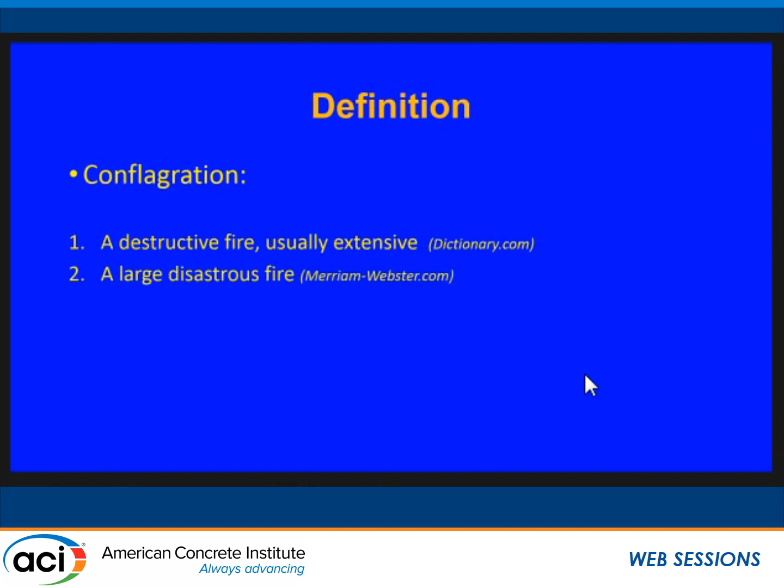So first of all, I want to start by giving you definitions of conflagration. In dictionary.com, it says it's a destructive fire, usually very extensive. For Webster's, it says it's a large, disastrous fire. And then, of course, the Oxford English Dictionary says an extensive fire which destroys a great deal of land or property.

These definitions of conflagration are important because they really are at the heart of what precipitated the use of building codes and regulations in communities in the United States.

So, I have a question for you. If I said, what conflagration do you know about or remember from history, what would be one of the fires that comes to mind?

Chicago. And sure enough, Chicago's the one that I decided I would start with and point out. Interestingly enough, you go read some of the history behind it. It started from a single source in O'Leary's barn. It doesn't say in the history that it really was the cow kicking over the lantern, although that's possible. But what's more important is the incident occurred during a time when there were high winds. There were a lot of flaming brands from the fire as it first started that began to be spread over a large area of Chicago.

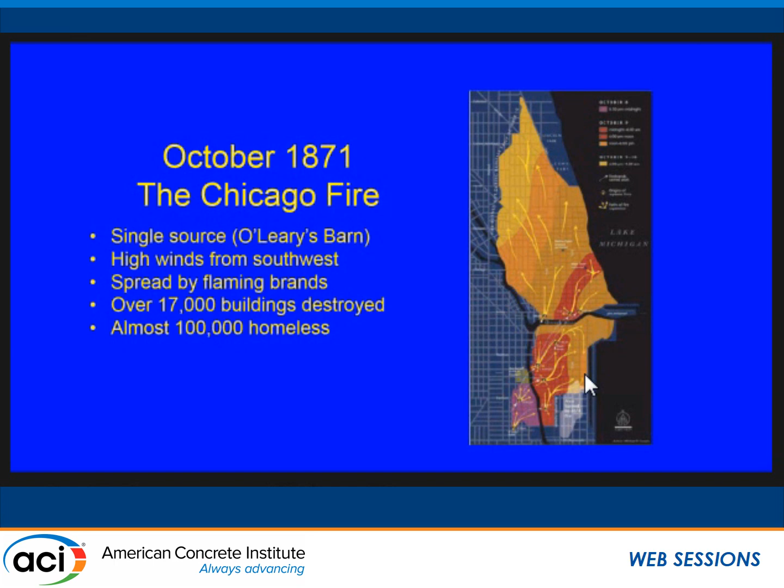17,000 buildings were destroyed, many of them constructed of wood. I'm not here to say that wood is a bad material, it's not, but it is unfortunate, it has that characteristic that it does burn. That helped contribute to the spread of fire, and when it was completed, it left almost 100,000 people homeless.

Well, there were other conflagrations that have occurred, some even before the Great Chicago Fire. One of them was in New York City in 1845, a whale oil and candle manufacturing facility. They actually used Spanish moss as part of their process, and some Spanish moss caught fire outside in the yard. Of course, flaming brands started to get spread by wind.

As part of that, they had a lot of buildings that were constructed of wood. And when the fire finished and was brought under control, 345 buildings were destroyed, $5 to $10 million in property damage. That was the last of 3 major fires that the city of New York actually had. They had one in 1777 and also in 1835.

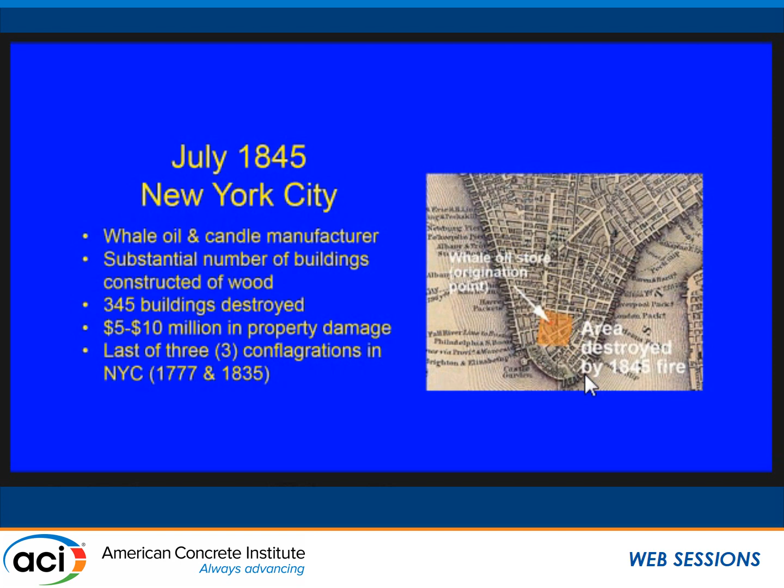One of the other ones was in Ottawa, Canada. Again, precipitated primarily by a building of wood catching on fire, a lot of closely spaced buildings, high wind. One of the other things that came into play then, and is probably true of these other fires that I just mentioned, was that the fire service sometimes didn't have the kind of equipment needed to fight these large fires.

Water supplies in the city sometimes were not adequate either, so many of these things created some of the difficulty in trying to address them. But regardless, this particular fire spread and thousands of buildings were destroyed, and of course I've shown a picture at least of some of the aftermath.

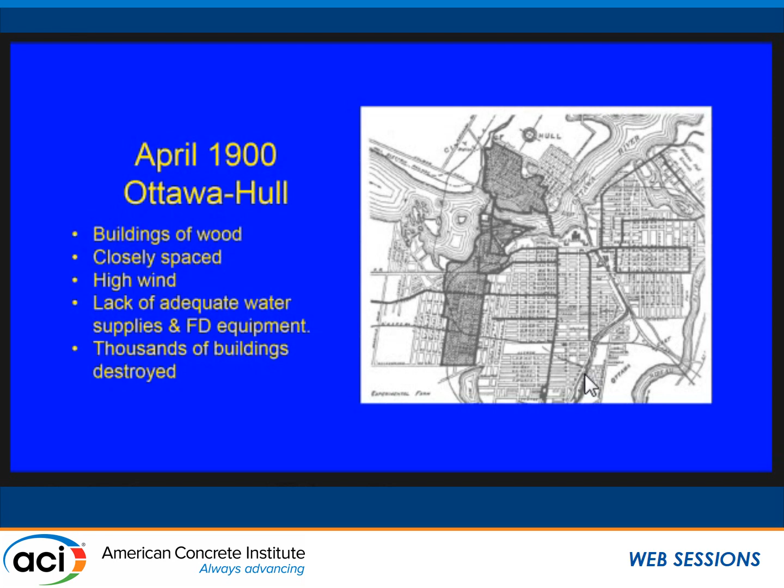Many times when I think about these fires, as I was putting together this presentation, I wanted to tell you - I kind of discovered this one, I didn't know that - but Jacksonville, Florida suffered a major conflagration in 1901. Same contributing factors: buildings of wood, high wind. In this case, 148 city blocks got destroyed, and over almost 2,400 buildings were destroyed in this process.

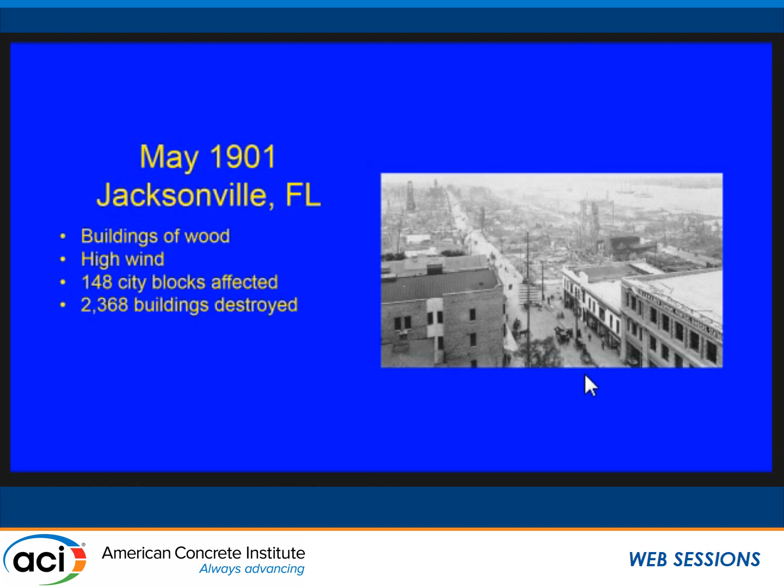And so the point I'm making is that the cities back at those times, it wasn't limited to what we think of as the big cities - the New Yorks, or the Chicagos, or even the San Franciscos - although all of those have experienced it, but even some of the moderate-sized cities in other parts of the country.

There was another fire in Canada worth mentioning: Toronto in 1904. That was their second major fire - their first one was in 1849. This second fire, 20 acres destroyed, mostly the business district, which represents a significant amount of property investment. In this case, they estimated $10 million in property damage. I should acknowledge these dollar amounts are dollars based on the time at which they occurred. They're not necessarily present-day dollars, which would be significantly higher.

And then there was also in that same year a fire in Baltimore in 1904 - 24 blocks of the business district. High winds contributed to it, buildings of wood construction. In this case, 1,500 buildings destroyed and an estimated $50 million in property damage.

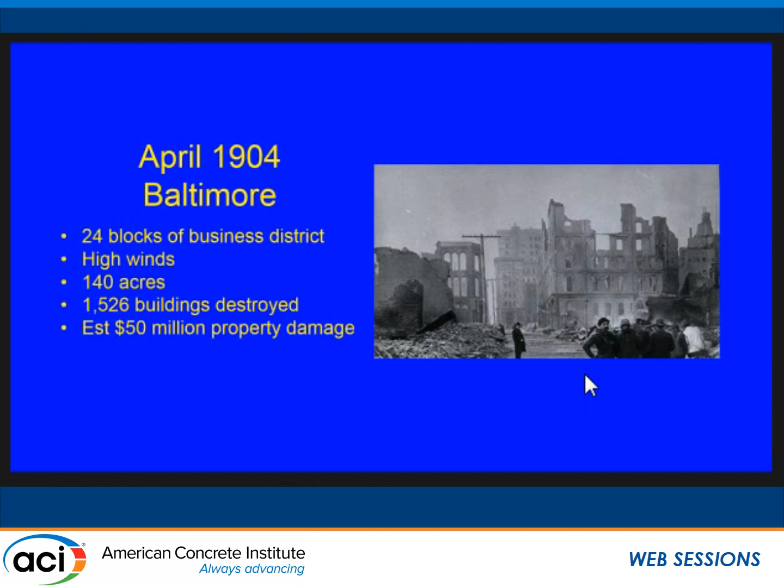And I want to stop right here and mention the 1904 fires in Toronto and Baltimore were actually, in terms of conflagrations, a tipping point for what really started precipitating building codes in the United States. It was precipitated really, let me say, earlier in 1866, when the insurance industries got together and formed a group called the National Board of Fire Underwriters. As far as I'm concerned, I describe them like a trade association for the insurance industries.

But their focus, because of these major fires that were occurring and the losses they were experiencing, was to try to see if they could develop fire-safe criteria for communities, to see if they could in fact set up a grading system and rank cities on how well they have fire service and water supplies and things to protect the properties, and then to provide consistency, because they found they were all over the board on what kind of requirements they had and what things they would underwrite.

And so that combination of things is why they came together, but they really didn't undertake a set of rules or things until those two fires in 1904, Baltimore and Toronto. All of a sudden the losses were so huge, they said, whoa, we need to do something. And so lo and behold, they got together and through their technical committee - not unlike we see operating today, even within ACI - developed a building code called the National Building Code.

And in that building code, they started looking at the features from what had happened before and what should be required going forward. And of course that included things like, in the very heavily urban areas, using more fire-resistive construction, limiting the amount of wood construction, paying attention to the municipal water supplies and what kind of water supplies are available to the community, paying attention to the fire service and whether they have adequate equipment to fight those fires, and even doing things like establishing fire districts. And I'll come back to fire districts in a minute.

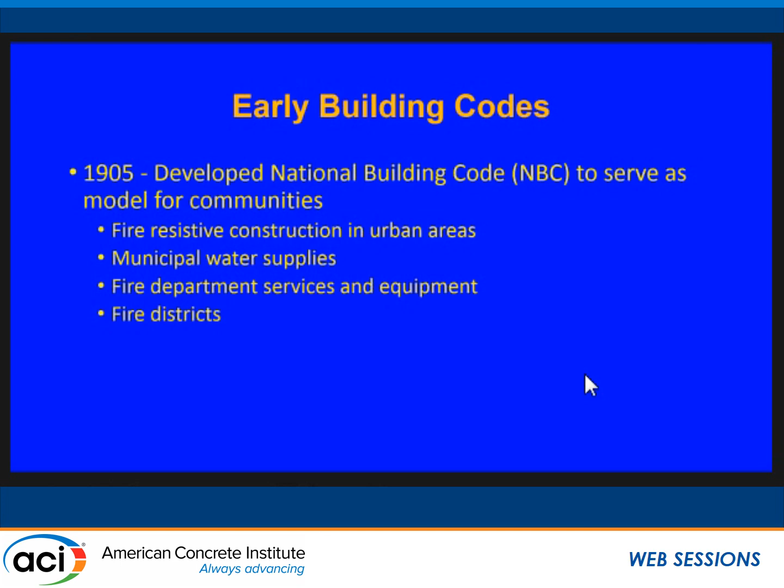But I do want to say, I threw this one up there just because I happen to be from the South - for your benefit, I'm from Macon, Georgia, about 90 miles south of Atlanta. And I didn't even know this till I was doing the research on this, that even Atlanta experienced a conflagration in 1917. In this case, they had the same characteristics: buildings of wood, large area - 300 acres, 1,900 buildings destroyed, 10,000 people displaced, and about $5 million in damage.

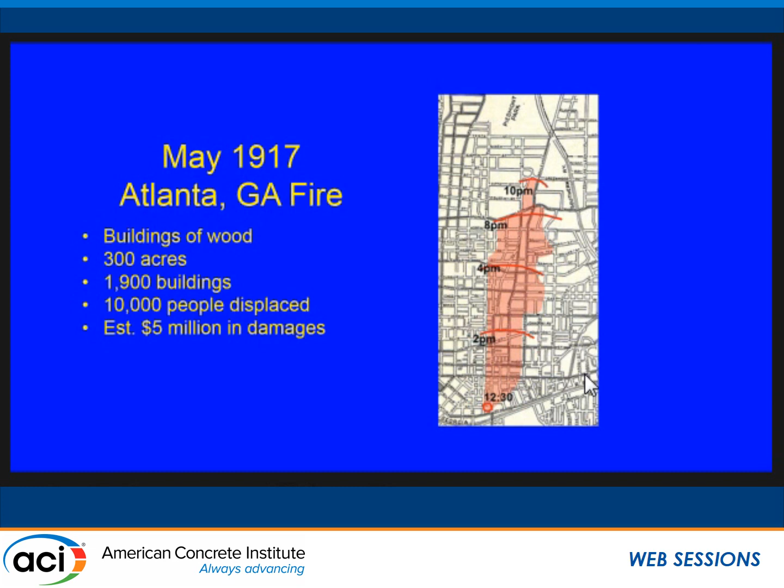That's after the 1905 National Building Code was established, but like anything, and we see today, when codes get set, sometimes the actual impacts of them don't show up till several years down the road. What was occurring after the National Board of Fire Underwriters established this code was a lot of municipalities were adopting code documents.

I happen to have in my possession two documents, from the city of Macon. I used to be a building official there. One of them is the 1914 building code, the other is the 1926.

In both cases, when I've looked at the provisions in those documents - they're not real big - and compared them to the 1904/1905 National Building Code, some of the provisions are very similar, usually encouraging fire-resistant construction and limiting wood in heavy urban areas, which would include setting up fire districts.

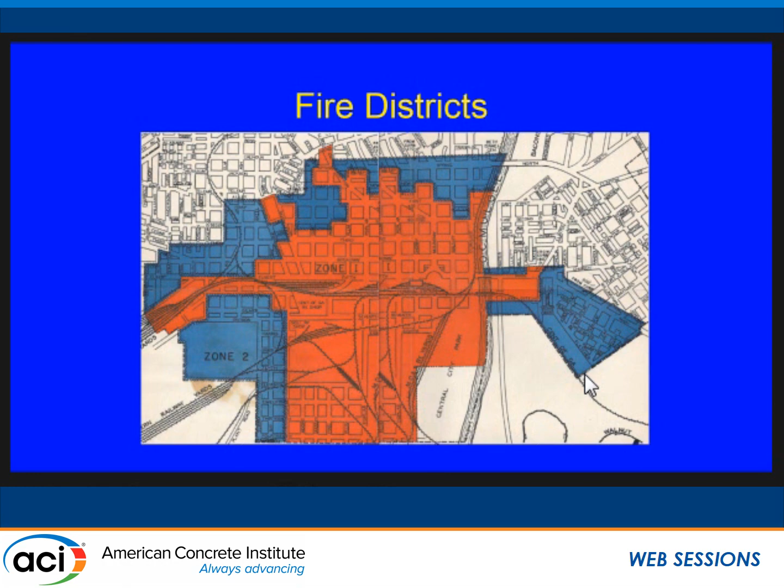Macon, when it first adopted those codes, set itself up with fire districts where it limited the amount of combustibles in those areas because of the high property value, and also required in some cases fire-resistant construction, and started limiting the size of buildings based on the types of materials being used to build them.

The whole purpose of that is to try to minimize damage to property should a fire event occur in a building. As time went on, one of the things that happened was the West Coast part of the country looked at the National Building Code by the insurance industry.

They really found it didn't totally suit their needs. Some of the means and methods of construction in the western part of the country were different than what was in the Northeast, and I have to acknowledge most of what the National Building Code reflected was construction manners of the Northeast part of the country.

So they got together and decided, let's put together our own code - I call it a regional building code - because they formed a group called the International Conference of Building Officials, made up of code officials from the major cities in the western part of the country, and put together this document.

From that, in the early 1920s, we began to see other parts of the country wanted their own codes too. BOCA, the Building Officials and Code Administrators, is the Northeast. The Standard Building Code for many years was the predominant code in the Southeast.

Those were outgrowths of what took place in the western part of the country when ICBO developed their Uniform Building Code. If you look at BOCA, they were actually the first code official group that formed, in 1915. They're the oldest model code group.

They developed a code called the Basic Building Code in 1950. A lot of its basis followed the National Building Code that we saw developed in 1905.

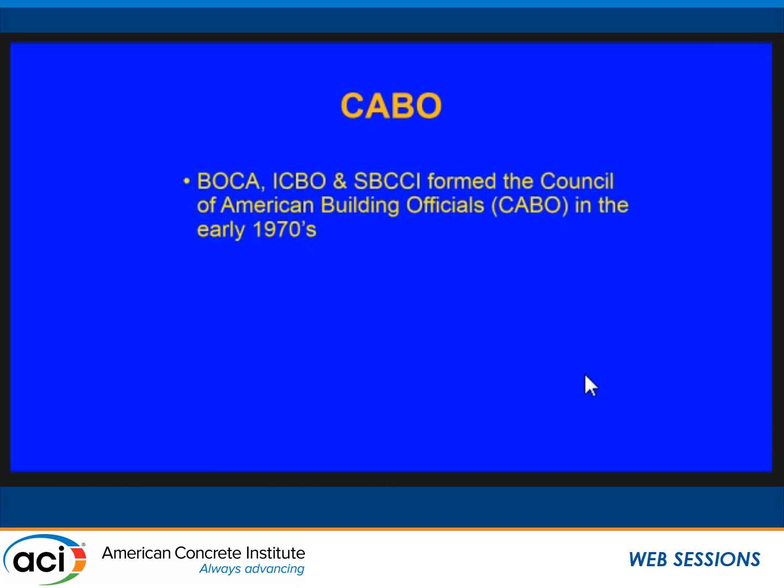And of course, one of the other things those three groups did to try to start on a more national basis was in the 1970s they formed a separate entity called the Council of American Building Officials for the purpose of developing a 1- and 2-family dwelling code to try to simplify and standardize construction of 1- and 2-family dwellings. They also, in response to the energy crisis in this country, started developing the Model Energy Code, again with a standardized mechanism in mind.

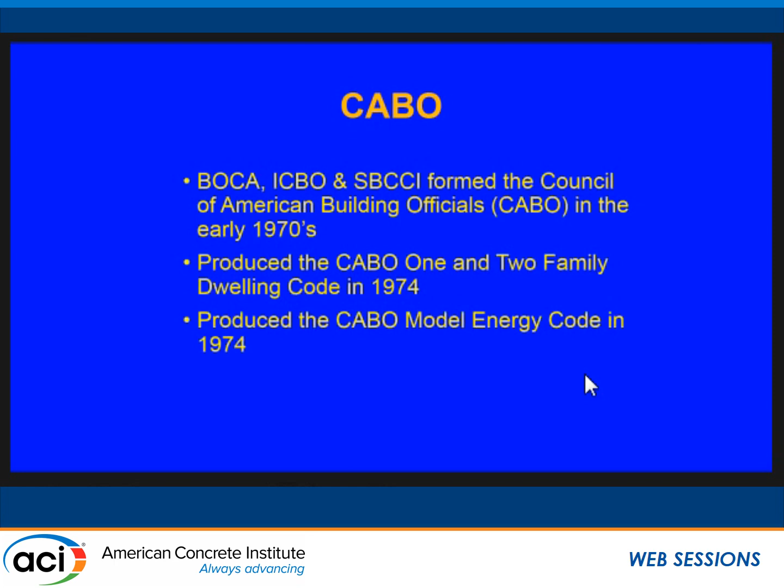In the mid-1990s, the three groups got together and formed the International Code Council. Now, the reason they actually formed it was because on the western part of the country, ICBO was using plumbing and mechanical codes developed by an organization called the International Association of Plumbing and Mechanical Officials, known as IAPMO. And IAPMO and ICBO kind of had a falling out.

Before that, they kind of worked as a group and had their set of codes to cover all features of building construction. But when they had this falling out, ICBO found itself with no mechanical or plumbing code. So they approached BOCA and said, we'd like to see if we could form a partnership and start using your plumbing and mechanical code. And that precipitated discussions to say, maybe we should get together and try to form an organization and develop a single set of codes.

And then they asked SBCCI if they wanted to join in. They said yes, and that's what created the coalition to start forming the International Code Council, and their goal was to develop a single set of construction codes for building, fire, plumbing, mechanical, gas, zoning, and energy as a single unit. That's what started taking place in the mid-1990s and eventually resulted in the first code being published in 2000.

One of the things they had to do, though, as part of that was if they were going to do a single set of codes, the three groups agreed to stop publishing their model codes. So sometimes if you hear somebody refer to a Uniform Building Code or a BOCA code, all of those documents stopped being published as late as 1999, and those are the last editions you'll ever see.

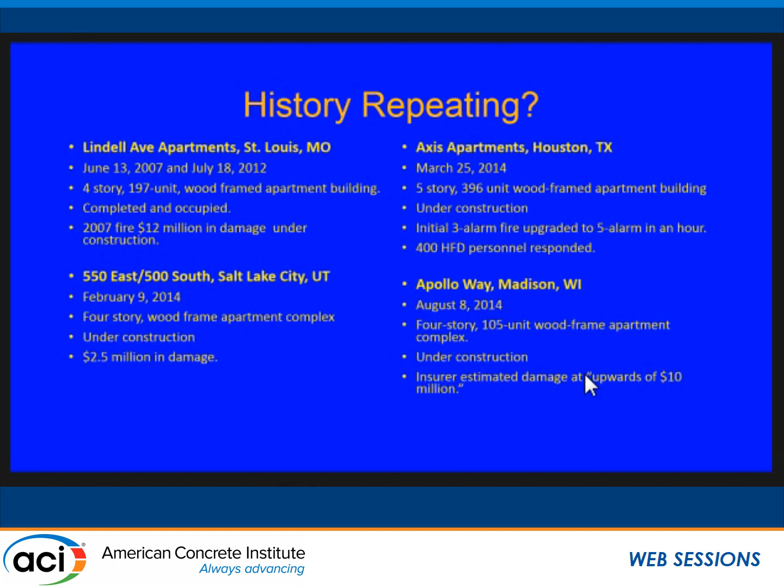We continue to see incidents time and again happening with these buildings in terms of burning, as well as, not so much a loss of life, we've not had that fortunately, but we require a lot of fire service attention to keep them under control and keep them from spreading. It also results in a lot of property damage. Many times the ones I just showed you, 3 of the 4 were under construction, but I want to acknowledge we're starting to see incidents of buildings burning that are occupied.

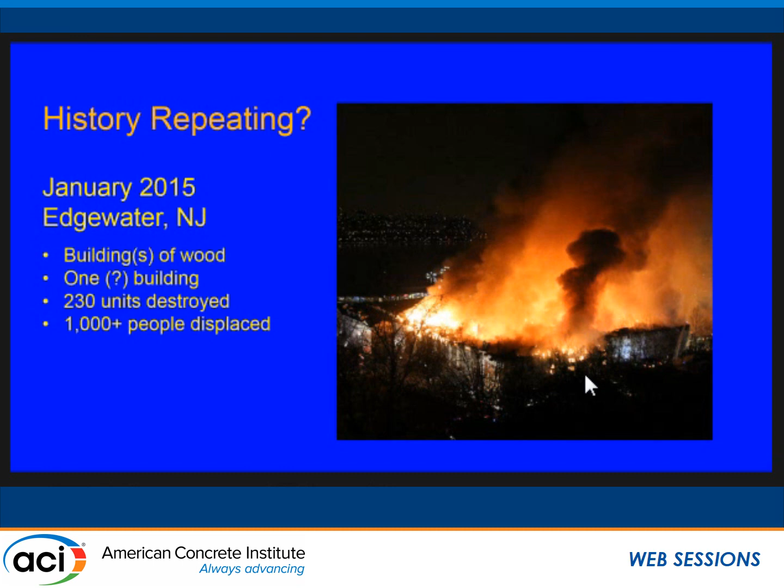I have talked to the fire chief that fought that fire, and he told me they had to depend on calling on fire departments in nearby communities to come in and help them because it clearly was overwhelming what they were capable of handling. Fortunately, no loss of life, I want to say.

And then I begin to say to myself, well, is history repeating itself? Just the other week or so ago in Raleigh, North Carolina, a building under construction, again a large wood frame building. I have visited the site, and I talked to the contractor. The building was completed in terms of the envelope enclosed. They were just starting to put the sheetrock in place. When the fire occurred, the fire service responded and fortunately did a good job of at least minimizing the impact.

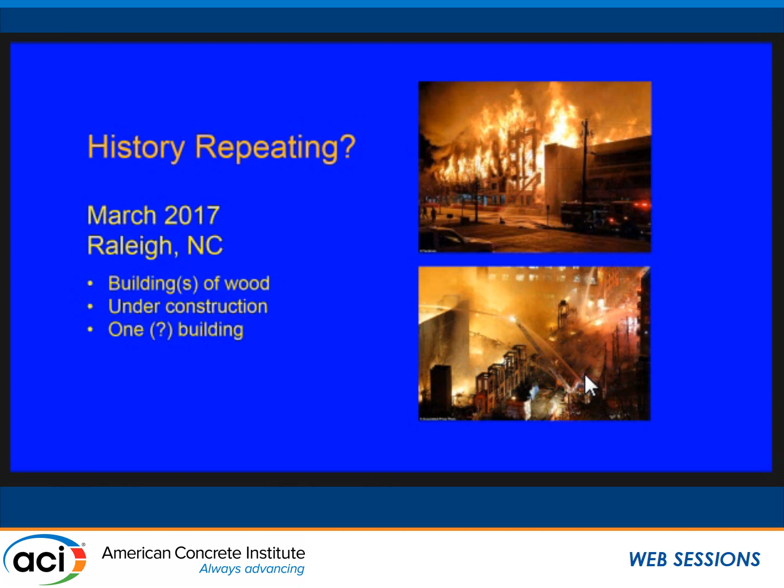But I want to acknowledge to you, this project reflects the fact that we're not talking just the loss of that building. We're also talking the loss or damage to surrounding buildings. That's a 12-story condominium building right there that is completely shut down right now, having suffered damage to the units as they face the building which was under fire, which used to be right here.

This is a condominium or an apartment building right here. The whole face of this suffered damage. A few of the apartments suffered damage. The fortunate part was the fire service was set up along here to protect the exposure. Otherwise, I'm sure if it had got into that building, which I suspect is wood frame, you'd have had this same incident happening like what we saw back in the 1900s, fire spreading from property to property to property.

And then I know there's at least three other buildings, these two and this building right here, all three suffered damage. The businesses were shut down because of this fire event. So it begins to raise the question, are we seeing the same problem that we first saw why building codes were developed? And I have a feeling, or suggestion, that I think we are.